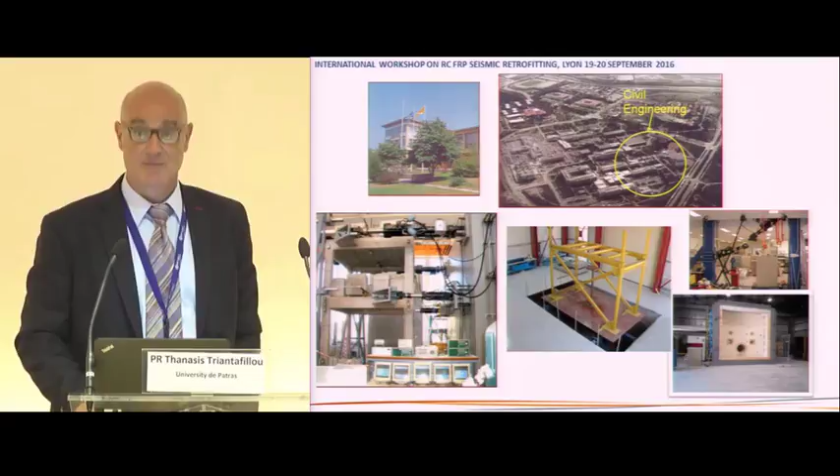Speaking of my university, this is where I come from, Patras, from the Department of Civil Engineering, where we are lucky enough to have very good testing facilities to do nearly full-scale testing, pseudodynamic testing of structures. There's also a relatively small shaking table, the materials lab, and our latest lab is one on fire testing, which we would like to explore as much as possible in the years to come.

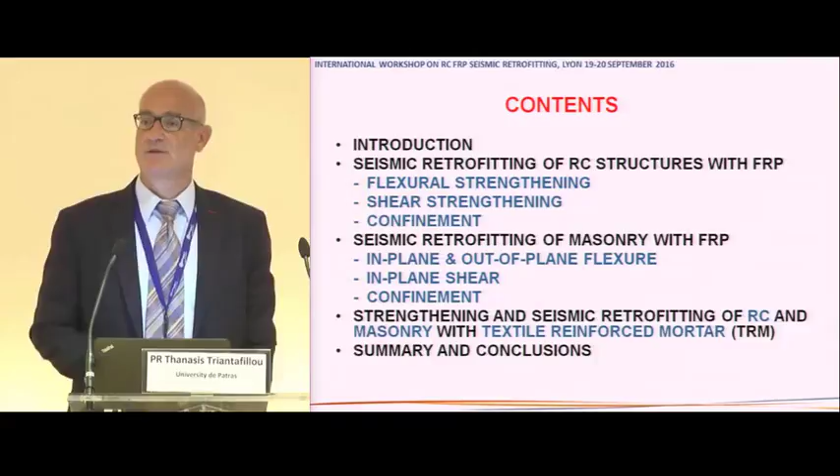These are the contents of my presentation. After a very short introduction, I will talk about the seismic retrofitting of reinforced concrete with FRPs. That will cover flexural, shear, as well as through confinement strengthening. And then I will spend some time to talk about masonry, retrofitted with FRPs, masonry subjected to in-plane or out-of-plane actions. Confinement also will be discussed. And at the end, I will spend some time talking about strengthening and retrofitting with cement-based, with inorganic materials, with fibers or steel or other types of fibers combined with inorganic materials, as was discussed earlier today as well.

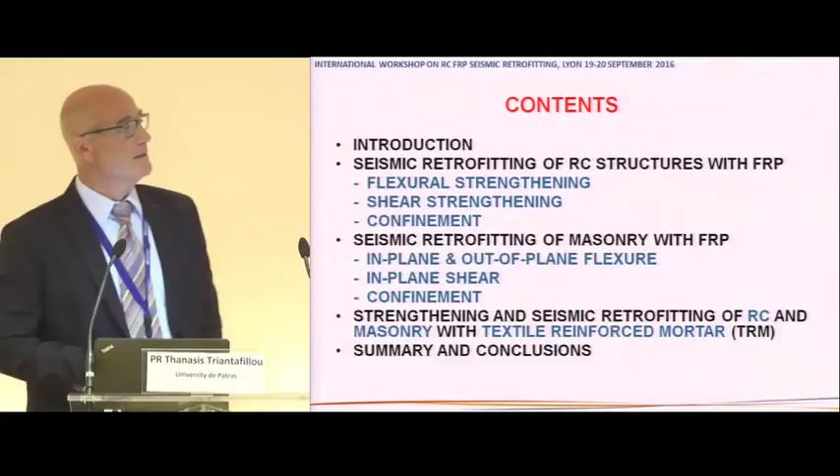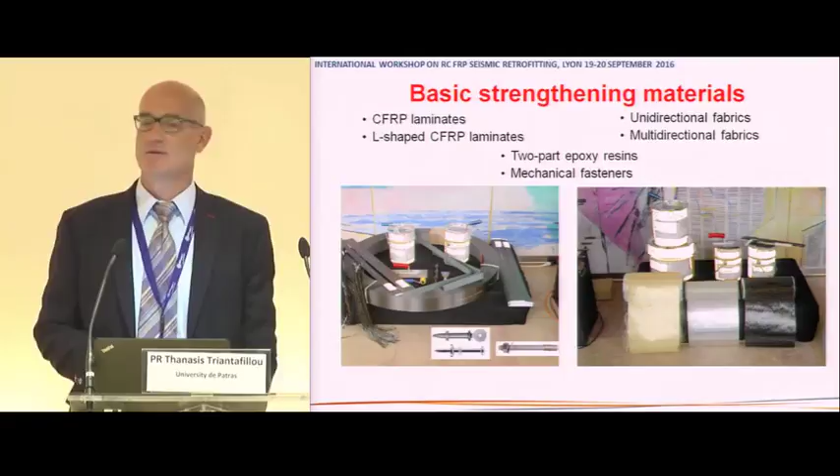I guess everybody knows that FRPs are basically made by combining fibers, carbon, glass, aramid, basalt, with epoxies. They are also available as prefabricated elements. So practically we have two different products. We have flexible fabrics and fibers and relatively stiff products which are epoxy bonded on substrates. This is the material we have to deal with.

If there is one thing that an engineer should know about these materials, it is that fibers behave linear elastic all the way to failure, unlike steel, mild steel. And depending on the type of fiber, we can have an elastic modulus from 70 to 230, even more, even up to 600 gigapascals. And of course, loads are only carried by the fiber. So our material is not isotropic as in the case of steel.

Here I have tried to summarize the advantages and disadvantages of the so-called FRP strengthening technique. Our materials are lightweight. They are resistant to corrosion. They are available in very long lengths. It is easy to apply them without much obstruction of occupancy. They have high tensile strength. It's very important that we do not change the geometry of cross-sections when we use FRPs to do retrofitting. And we do not also modify the stiffness characteristics.

That may be thought of as a disadvantage, as a negative point, as well as a positive one, if the objective of the intervention is to make a structure stiffer. So using FRPs to make structures stiff is not the way to go. That is something that we should remember.

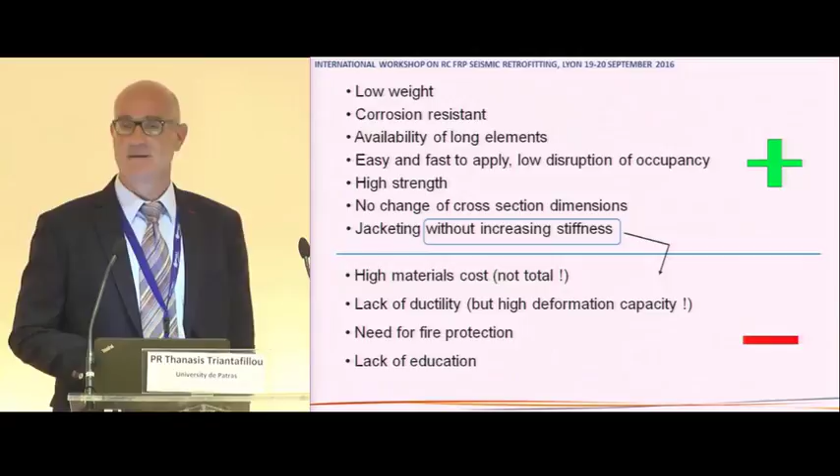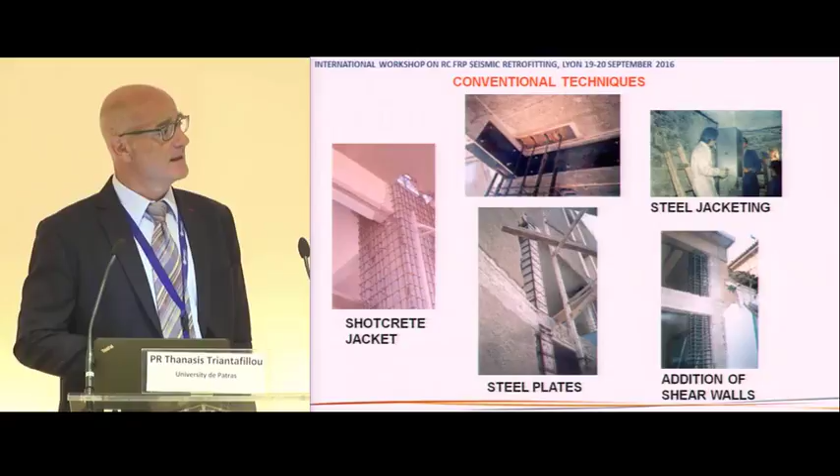Before playing with FRPs, we were used to a number of different techniques, mainly related to the application of steel. To name a few, I will refer to jacketing, to shotcrete, to jacketing by using shotcrete, or to the application of steel plates, steel jacketing, the addition of shear walls, you name it. And then we have the two basic FRP techniques. We do wrapping of structural members with flexible products, or we epoxy bond relatively rigid elements like carbon-based laminates, for example, externally.

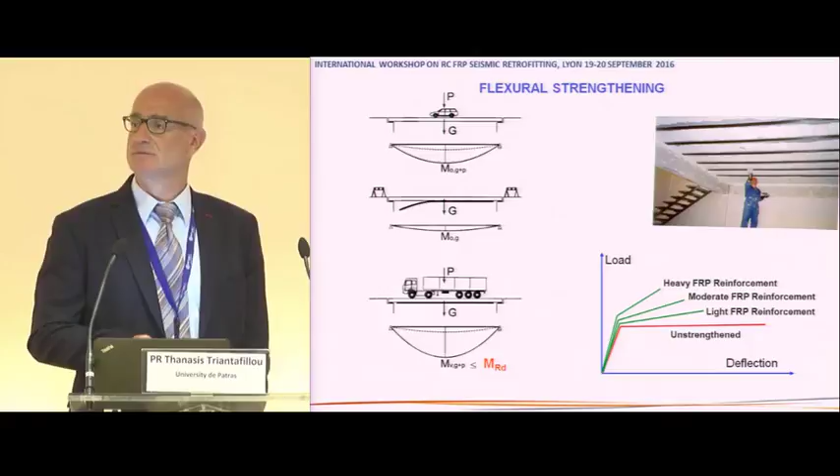The point to remember here is that we don't really change the stiffness. There is a very slight increase in stiffness. Of course, there is a lot of strength gained by the method, but there is also a reduction in ductility. This is not due to the fact that we add FRPs. This is due to the fact that we increase the amount of tension reinforcement. And it has nothing to do with the material itself. And most likely, failure is brittle, is catastrophic due to the sudden debonding of the member, unless we do something to prevent it, unless we use anchorages, for instance.

This is definitely not the way to do flexural strengthening of columns. Although it has been done in many projects, this is not the way to do it. Beams are very easy. Columns are a bit trickier. By adding external reinforcement in columns, top to bottom, we only spend money. We really have to pass the reinforcement through the joints. We have to anchor them through the joints and also do something at the ends to prevent local buckling, etc.

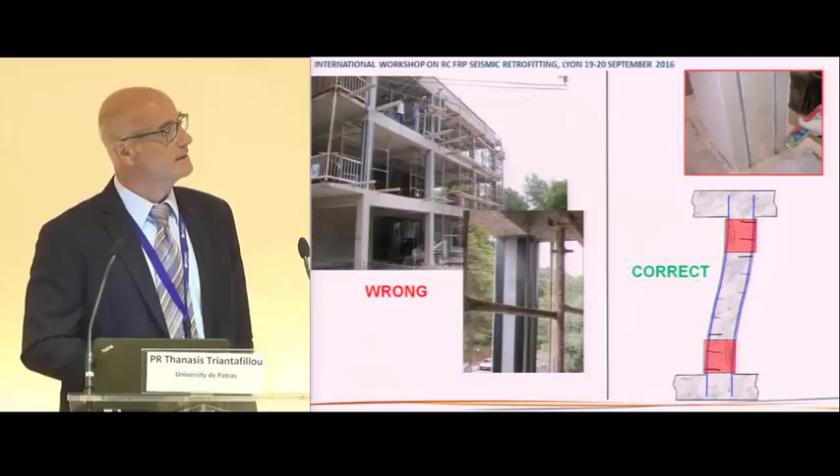So if the objective is to do flexural strengthening of columns, we need to remember that we must extend the material through the joints, slabs, foundations, whatever. Because typically this is where moments are high. There are a number of ways to do it. One is to use near surface mounted reinforcement, that is FRP or even steel rebars placed inside grooves. Or we can use fabrics with the fibers in the longitudinal direction of columns, anchored using spike anchors.

That was discussed by other presenters earlier. Fixed in the foundation blocks, in the slabs, or in the joints. Here, the point to remember is that by applying this method, we only increase the flexural resistance. If we take a look at axial force versus bending moment diagrams, interaction diagrams for these members, there is practically no gain in axial resistance. We only increase the flexural capacity. So the method is beneficial only if the axial load is relatively low, let's say below 0.3, 0.4 of the strength, 30, 40% of the axial capacity.

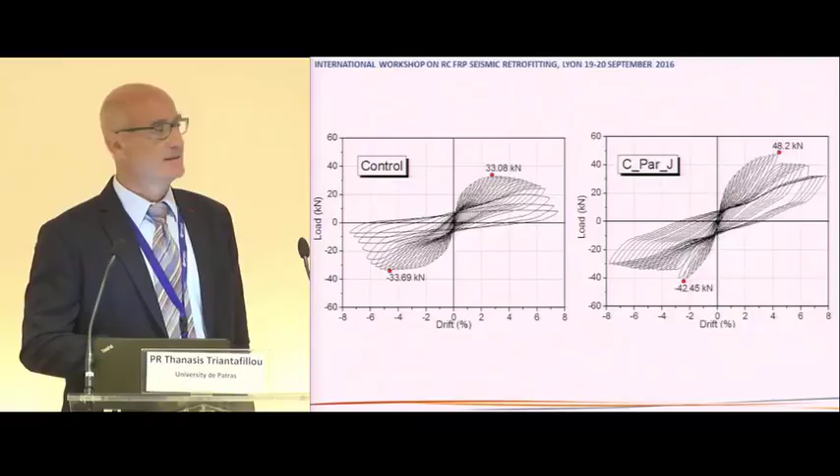And that's a typical comparison of a reinforced concrete column, flexurally strengthened with FRPs. That's a control specimen that is prior to adding the flexural reinforcement, and this is what we get by an identical specimen with this extra externally applied reinforcement. There is an increase in the strength, but practically no increase at all in the stiffness.

When it comes to shear strengthening, the objective of the intervention here is to modify the failure mode from brittle, with very low ductility, to very nice ductile flexural type with stable hysteresis loops. So we practically have to add extra shear resistance to members, and the question is, how do I calculate, how do I design, how do I dimension the externally applied reinforcement to get this extra resistance?

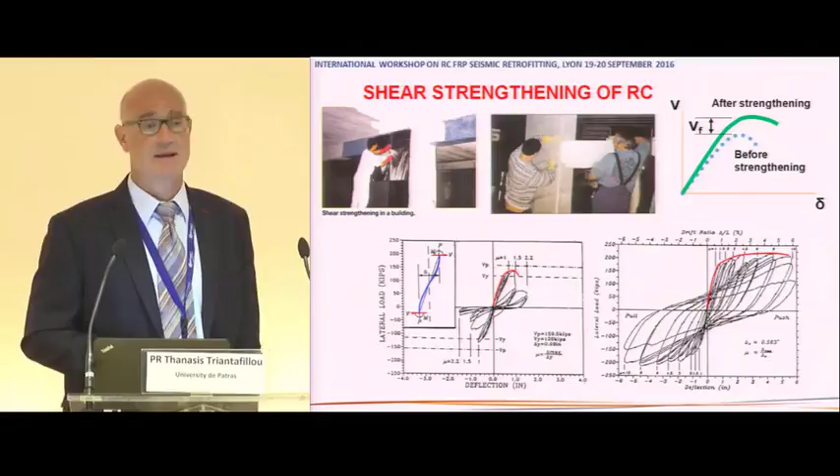The philosophy here is identical to stirrups in reinforced concrete. We have to think of the fibers as an infinite number of stirrups. We have thousands, millions of tiny stirrups applied externally. So they have to be applied in the direction of the principal tensile stresses, basically.

These are typical configurations of FRPs to do shear strengthening. In the case of T-beams, we have many options. Normally we do this one. We use three-sided jacketing with or without anchors. This is a two-sided jacketing, which I would avoid. We have no reason to do that. It's not effective at all. It will debond prematurely. We can simply continue the jacket all around in the web.

Another possibility is to anchor the fibers through the slabs, as was shown also earlier in several presentations. Of course, one expects that this is much more effective than what we have here, because those tension elements, those stirrup type elements are fully anchored. They form a loop, so they carry stresses, and most likely the failure mechanism here will be tensile fracture of the fibers as opposed to debonding, which might be the case if we have open jackets.

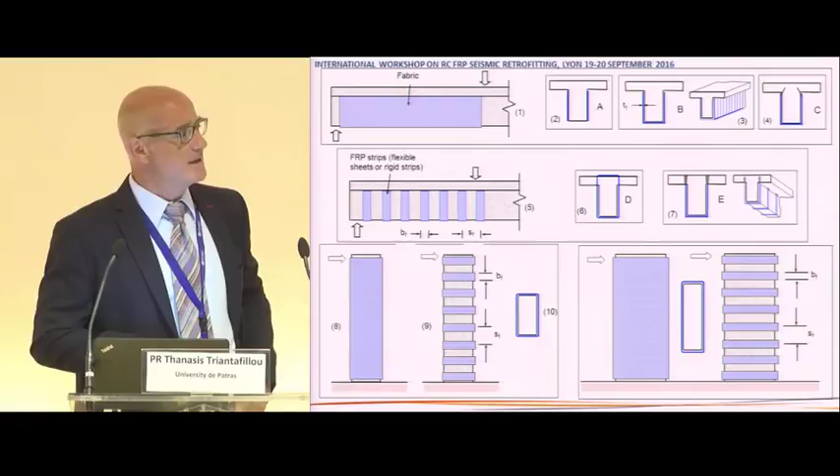When it comes to columns, our life is of course much easier. Typically it is quite easy. We have access around columns. Even if we don't, all we have to do is to remove some of the parts of the infill walls adjacent to the columns to get access. So normally, making those closed jackets in the case of columns is easy.

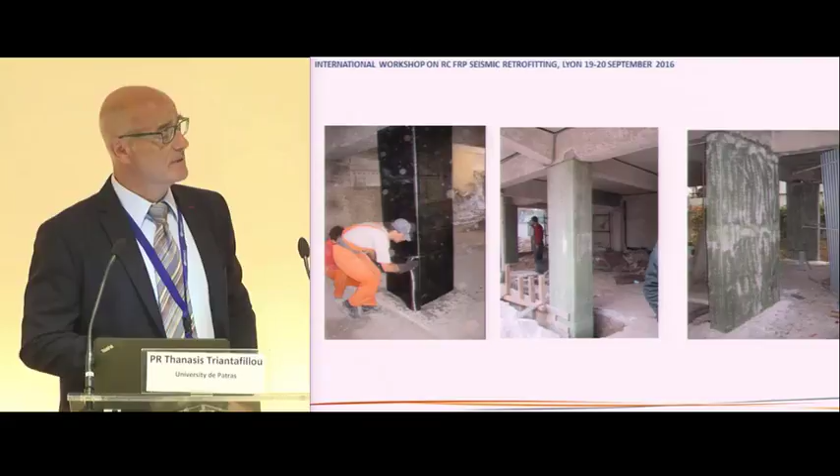A few photos to illustrate the concept. You see wrapping of columns to increase the shear capacity with carbon or with glass fibers. Wrapping of members supporting large structures for shear strengthening, as well as for confinement, which I will discuss a bit later. We can do many very good jobs. You see stirrup type elements, straight fibers, or wrapping of columns to increase the shear resistance.

We can also do a lousy job if we do the application the way you see here. It is not a good solution to try to apply the reinforcement, to follow the profile of the cross-section, unless we do something about the anchorage that will debond prematurely and will not really add any capacity to the member.

When it comes to calculations, to the dimensioning of shear strengthening, we have one unknown, that is how much extra capacity, how much additional shear strength I need to add to my structural member. It's right here. This is the total capacity, and all we have to do is relate the contribution of the FRP to the shear capacity of the structural member to the properties of the jacket.

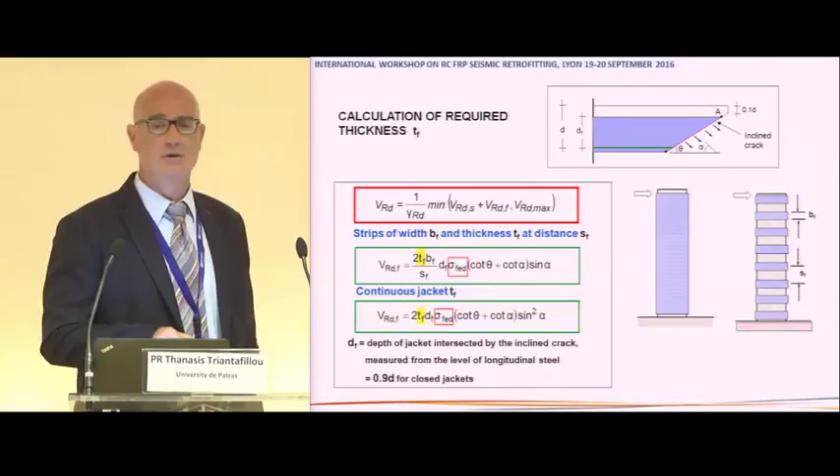One possibility is to use formulas, equations which are identical to what we have for the case of steel stirrups, internal stirrups, the only difference being that we don't have a yield stress for our strengthening element. We have an effective stress, the stress in the FRP at failure of the jacket, which depends very much on the failure mode. It depends on whether the fibers will rupture or will debond, and that is something we have to take into account.

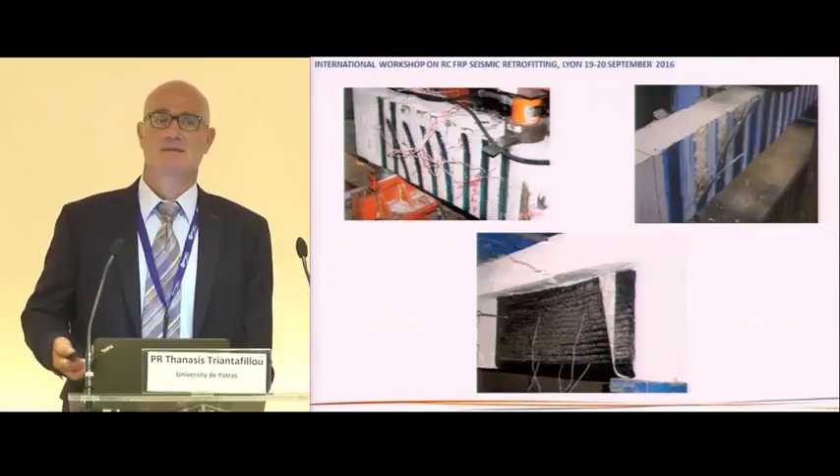Speaking about debonding, you see what I mean here. This is an open jacket. These are strips applied to do shear strengthening. The fibers are not continuous, so most likely what we expect is this type of debonding in the free part, which is also shown here. So the fibers are not utilized to their full capacity, and that is something to be taken into account in design.

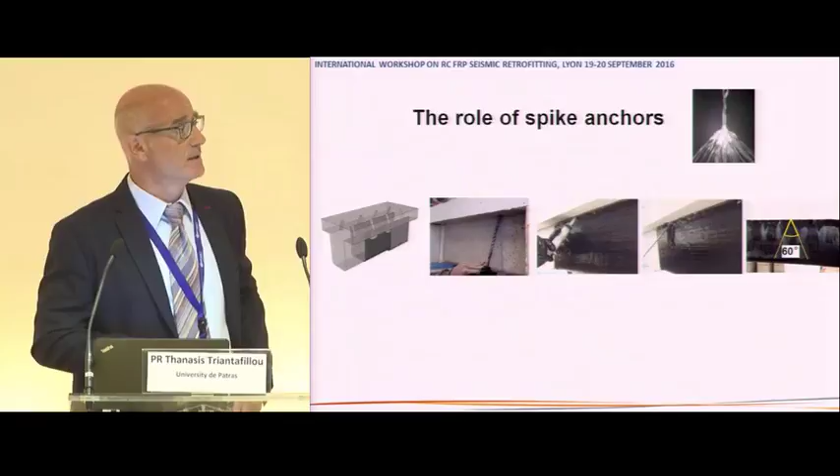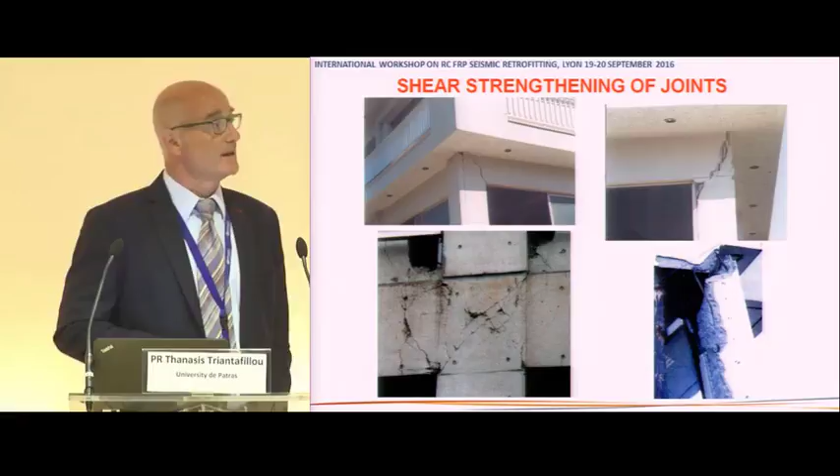Shear strengthening of joints, that was very nicely covered by Maurizio this morning. That's a very tricky area. We typically get shear failures in joints due to the lack of continuous stirrup type reinforcement in those elements. One way of shear strengthening the joints is through the application of FRPs. Ideally, we should place the fibers in two directions, both horizontally as well as vertically. If we choose one of the two methods, the horizontal configuration is preferable, but ideally we should do both.

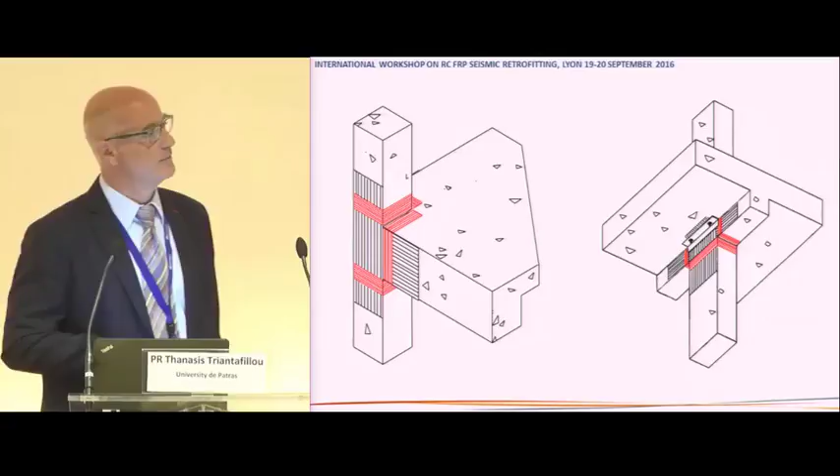A few applications on shear strengthening of joints. So you see the fabrics applied horizontally in this case.

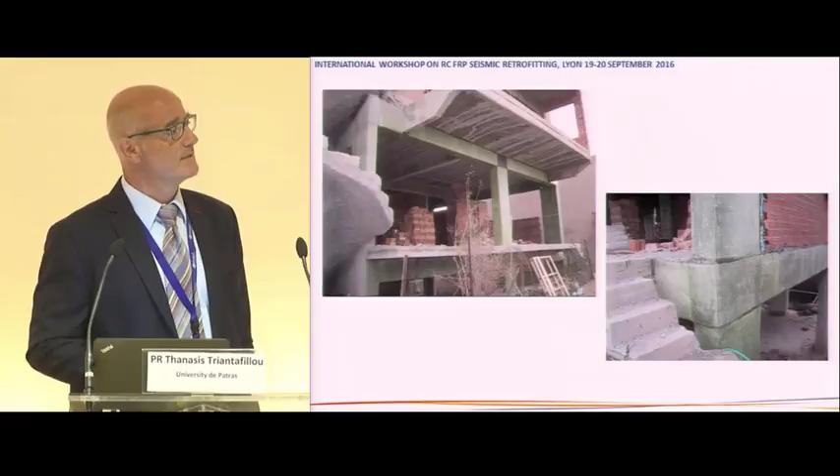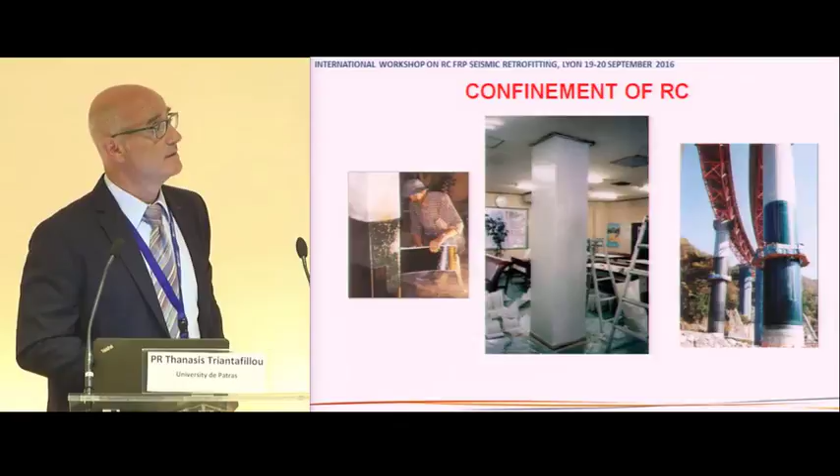Time to say a few things about confinement, which is probably the most important application of FRPs in seismic retrofitting. We do confinement for many reasons. They were discussed by Maurizio. I have tried to summarize them here as well. If we do full wrapping of columns, we normally do this to increase the axial capacity of members. But if our interest is increasing the deformation capacity, we only need to do local jacketing, only at the ends of members to confine those areas.

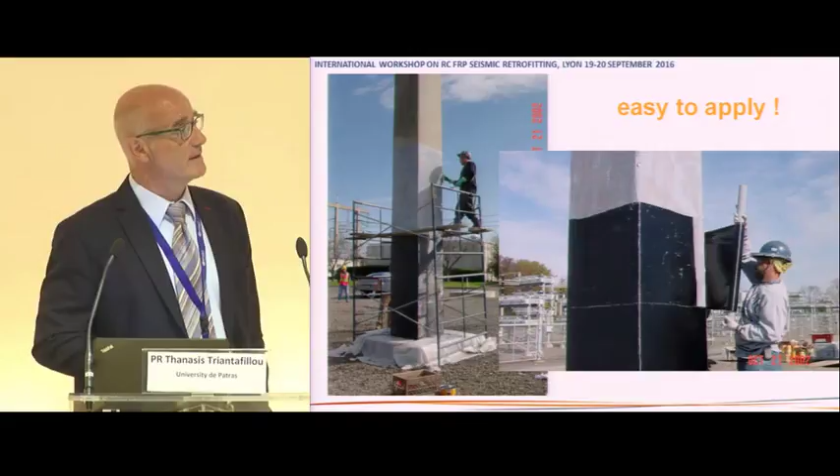We do this local jacketing also to prevent failures at lap splices and also to delay or even eliminate local buckling of the longitudinal reinforcement if our stirrups are at a relatively large spacing. So those are the basic reasons why confinement is done by FRPs. And why FRPs as confining elements? They are very easy to apply. This is the proof, that's a huge column and everything is done by a single person.

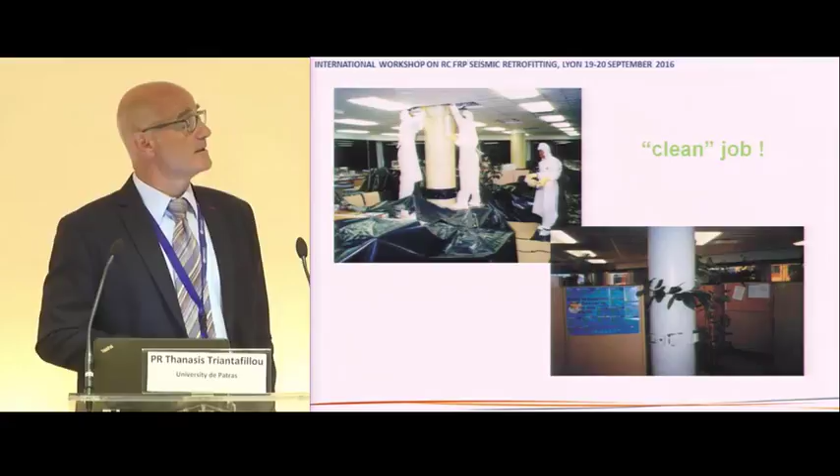It's a relatively clean job. We don't really disturb the occupants in buildings. And here are some photos of the application. Full wrapping with glass fibers in small dimension columns to increase the axial capacity.

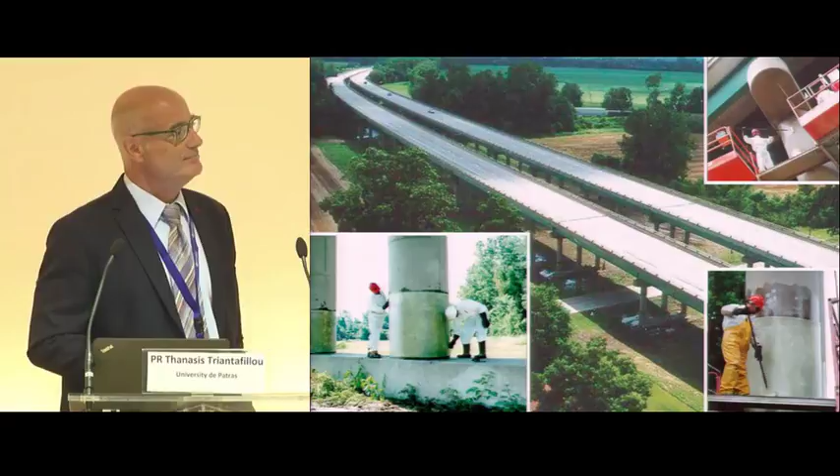This is an interesting project from the UK. This is confinement of columns with aramid, which is also resistant to impact. You know, those columns are sometimes hit by drunk drivers in the UK. Hopefully we don't have some of them here. So aramid was selected as a solution here to also be impact resistant. That's one of the very first applications of FRPs in the early 90s, in the United States, involving local wrapping of large diameter circular columns to enhance ductility.

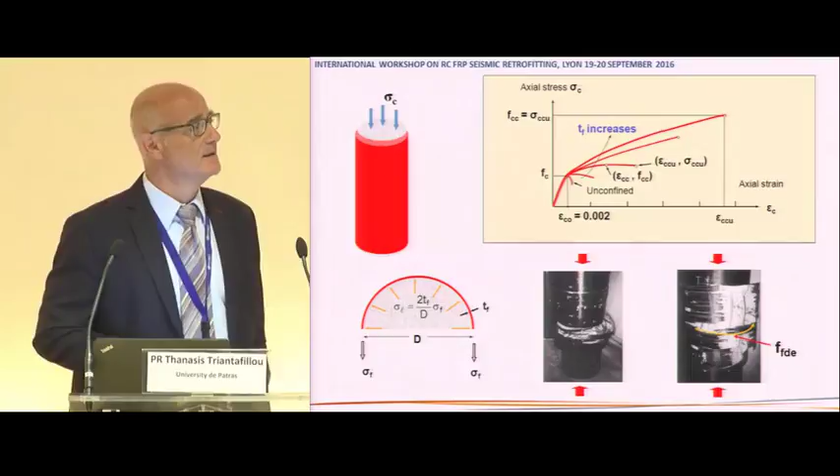There's of course no time to talk about modeling and all the details of the design calculations, but I will only say that what we need is a simple confinement model. That is, we need to somehow relate the increase in the strength of concrete or the increase in the deformation capacity of concrete to the properties of the jacket. And clearly, the thicker the jacket, the higher the number of layers in the jacket, the higher the strength and the higher the deformation capacity. If we have such a model, then we use it in our design formulas to do the dimensioning.

If you look in the literature, you will literally find hundreds of these types of confinement models relating the strength or the deformation, the ultimate strain of confined concrete, to the confining stress. This sigma, whatever, LUD is the design value of the ultimate confining stress exerted by the jacket in the concrete. And that confining stress can be related to the properties of the jacket and to the geometry of the cross-section. It depends on the dimensions of the cross-section, on the rounding at the corners, etc. So that's the whole idea. If I want to calculate how many layers I should use, I need to have one of those confinement models and plug in all my parameters.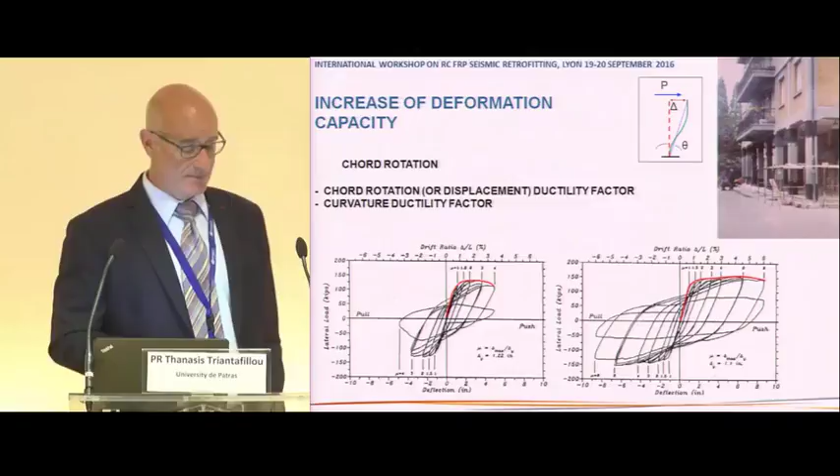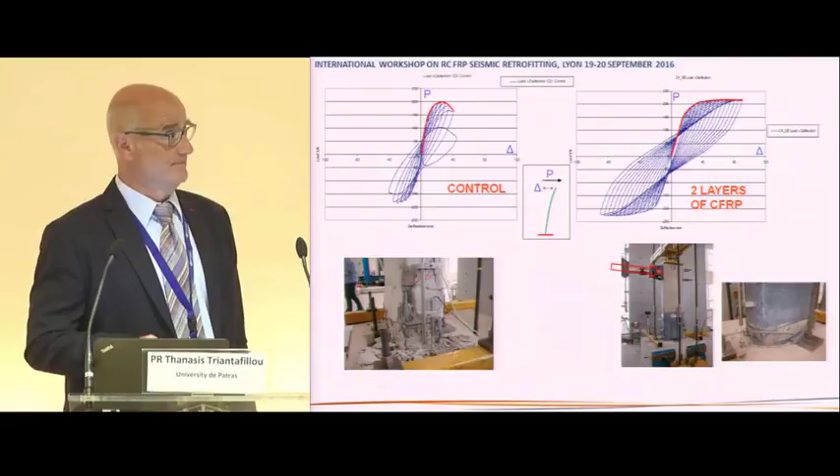And here is an example of how that increases easily by applying, for example, a couple of layers of CFRP, even in columns with rectangular cross-sections in the order of 25 to 50 centimeters, as is the case in this photo. This is the response, the force versus the lateral displacement of typical columns. It is really important to emphasize that there is practically no increase in the strength. So we don't do this jacketing, this local confinement, to increase the strength of columns. We only do that to increase the ductility, to have a number of stable hysteresis loops and get a lot of deformation capacity. So strengthening is not the case.

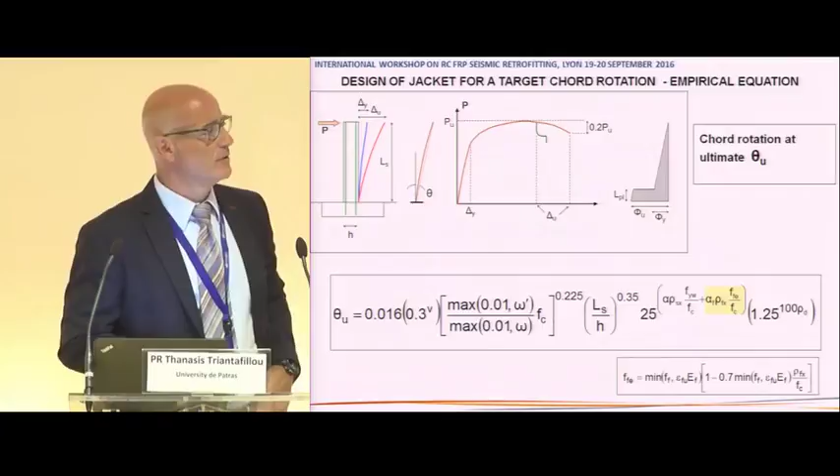Again, calculations are relatively straightforward. We won't discuss the details. We have to relate the ultimate value of this chord rotation to some properties of the jacket. There are some analytical formulas. For example, if you go by basic principles, you can relate this ultimate chord rotation to the ultimate curvature of cross-sections. This ultimate curvature depends on the ultimate strain in the concrete, which depends very much on the level of confinement. And by doing that, we can do the design. Alternatively, we can use empirical formulas, simplified and highly empirical, relating the geometry of the cross-section, the amount of internal reinforcement, strength of concrete, the shear span, etc., as well as the properties of the jacket, to the ultimate chord rotation. This is a copy of the formula from Annex A of Eurocode 8.

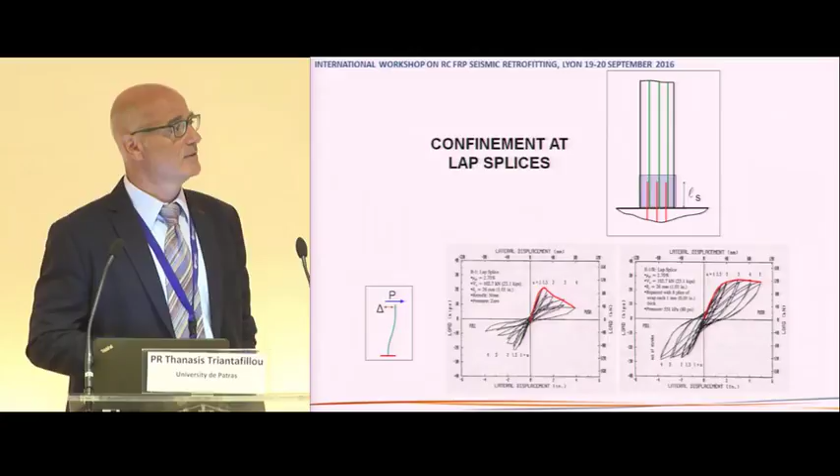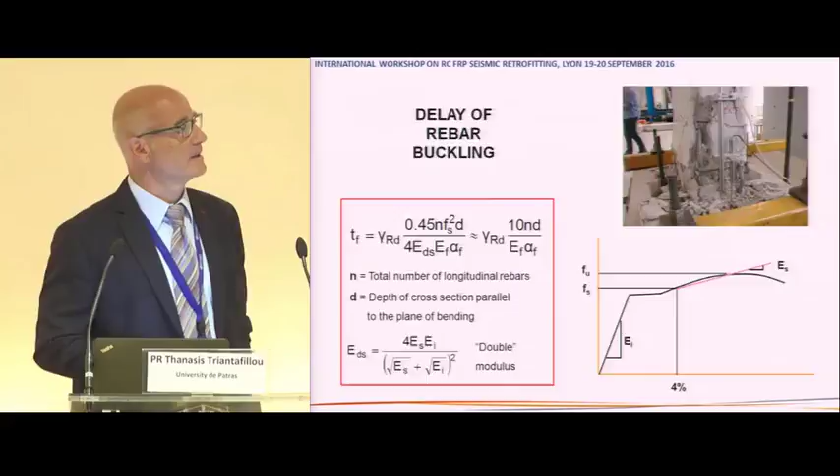The third reason for confining columns is to prevent failures at lap splices. Again, jacketing here is local and it transforms brittle, catastrophic failures without ductility into very nice ductile ones by preventing slippage of rebars in splice areas. The mechanism is very simple. By confining those areas down here, we mainly increase the friction. We can think of a friction model, so we increase the friction here, hence we increase the shear strength of the concrete. Hence we prevent this slippage. And the delay or the prevention of buckling of the rebars is the last application related to confinement in reinforced concrete. To make a long story short, I will try to summarize this design procedure for columns.

First of all, we have to make sure that the objective of our intervention, of our retrofitting, is not stiffening. We cannot make columns stiffer by using composites. So if that is not the case, then we have to design the jacket for the target value of the shear resistance. So we do the shear strengthening first, so that we satisfy the capacity design requirements. So that is, flexural failure comes first. And then we design for the target deformation capacity, for example, the chord rotation or the chord rotation ductility factor.

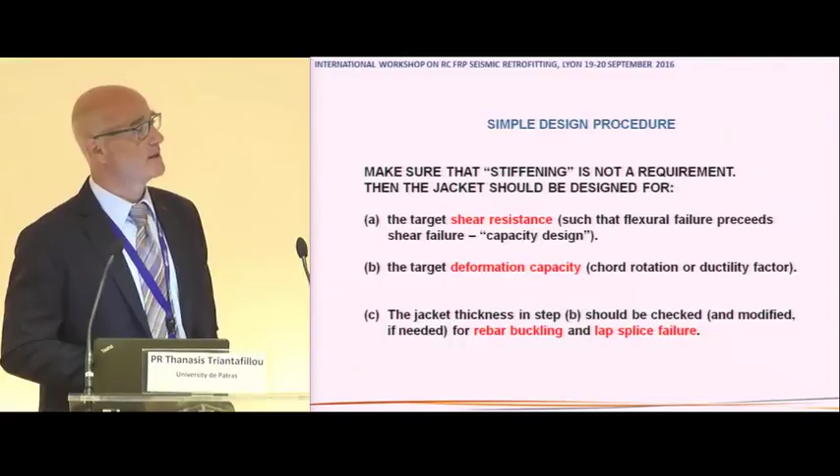And then we check the thickness of the jacket in this step for the case of rebar buckling or for the case of lap splice failures. I think I have, yeah, here is an example of this approach.

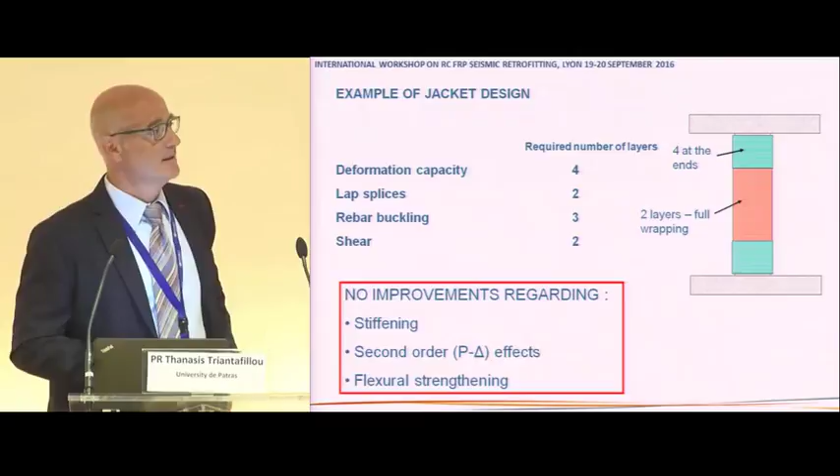Let's say, for instance, that our calculations result in 4 layers for the deformation capacity. If I need to reach a certain level of the deformation capacity, I need 4 layers. I need 2 layers to prevent lap splice failures, 3 to prevent buckling of the rebars, and 2 to eliminate shear. Then I wrap the column from top to bottom with 2 layers, and then I add another 2 at the end, so that I have 4, and that will cover all the cases. Again, I don't provide flexural strengthening. I don't solve any problems related to P delta effects, to stiffening, etc.

Okay, maybe quickly we can take a look at a case study. That's a building that was retrofitted about 10 years ago in Crete. That's a beautiful island in Greece. If you have not been there, you should go. In the south part, I'm sure you know it. The objective of the intervention there was to complete the job in about a month. That was a private hospital in the city of Chania in Crete, which was retrofitted with about 800 square meters of carbon fibers.

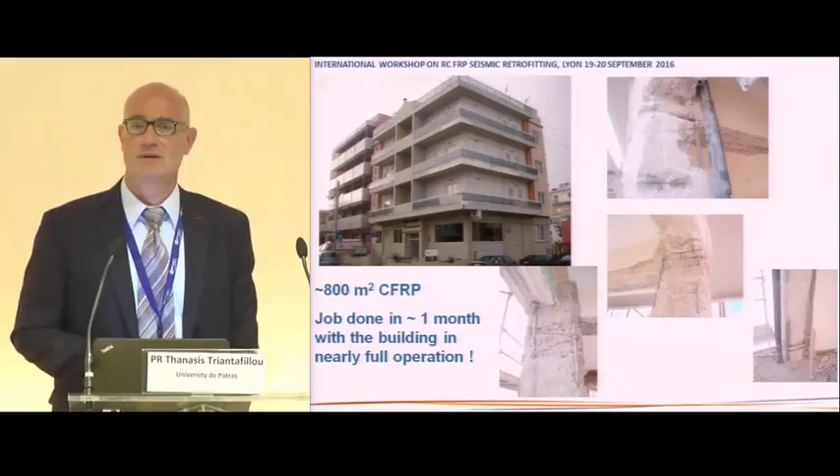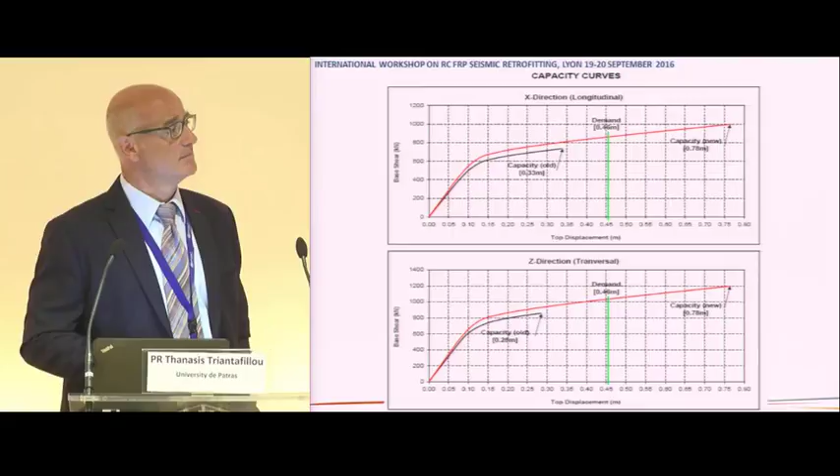Of course, an analysis of the structure has to be done first, a nonlinear analysis to get the response prior to retrofitting. These are capacity curves, base shear versus top story displacement. Capacity curves prior to retrofitting, shown by black, and after retrofitting, shown by red. Again, there is no stiffening in the building. The only result of this intervention is that the ductility, the deformation capacity, increases considerably, extending well beyond the target that is shown by the green line.

This was done by wrapping columns, by shear strengthening in the columns, by shear strengthening in the beams, shear strengthening in the joints, and of course by increasing the ductility in columns through local jacketing. Some of the cantilevers had to be strengthened in flexure as well.

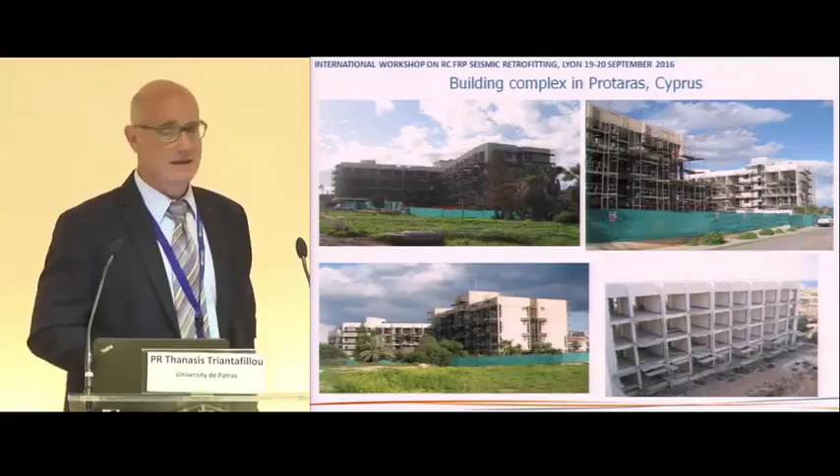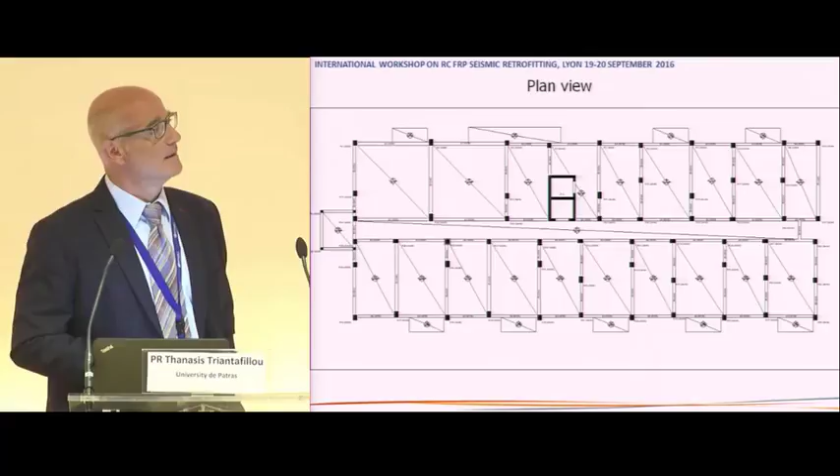Well, I'll skip all the drawings and only say a few words about another interesting application in Cyprus. The idea here was to strengthen, as well as to increase the ductility and the stiffness, in a relatively flexible building with the plan view that you see in this slide. There was heavy local damage in various structural members in this structure. The retrofitting scheme was a mixed one.

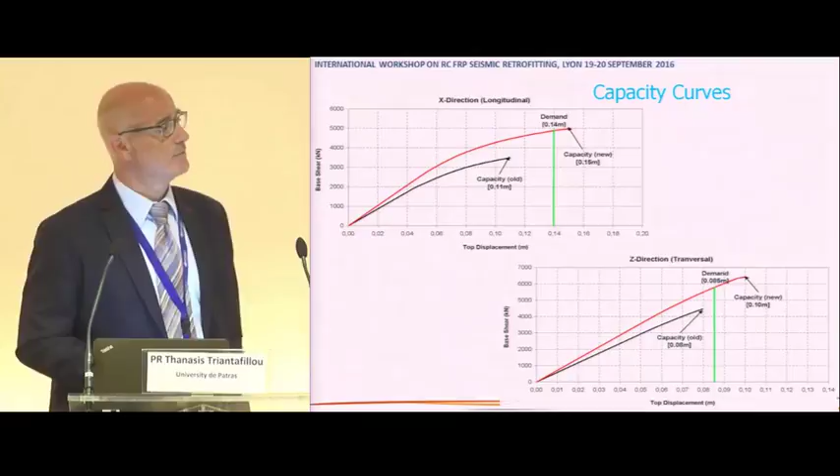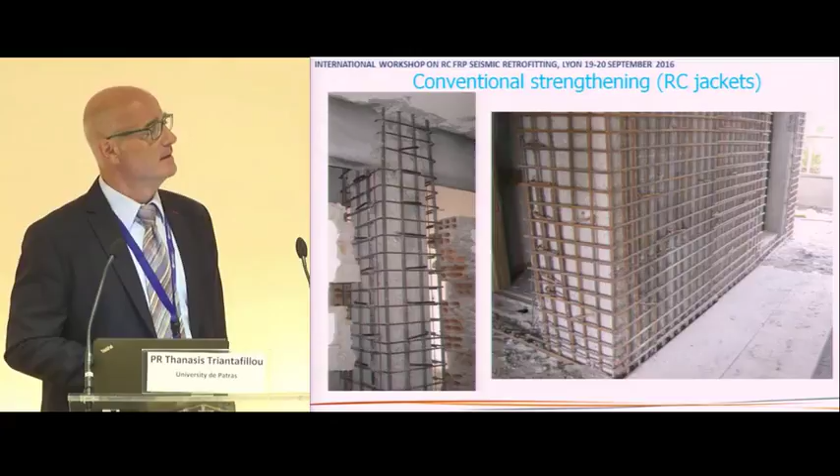It involved repair of the local damage, reinforced concrete jacketing, shotcreting in selected columns and shear walls, as well as the application of CFRP or GFRP to increase the shear capacity of certain columns. As opposed to the capacity curve that we saw in the previous case study, here we have a non-negligible increase in the stiffness of the structure through this mixed strengthening scheme. There is an increase in the strength as well as extra ductility, extra deformation capacity. A few photos. This is the traditional method of shotcreting and reinforced concrete jacketing combined with FRPs used to do shear strengthening of beams or columns.

Well, let's talk a little bit about masonry. It all started with concrete, something like 30 years ago, maybe more. And then people thought that FRPs would be a good possibility for unreinforced masonry structures, subjected mainly to seismic loading. Why? Because those structures are made of structural members which have a behavior very similar to the behavior of plain concrete.

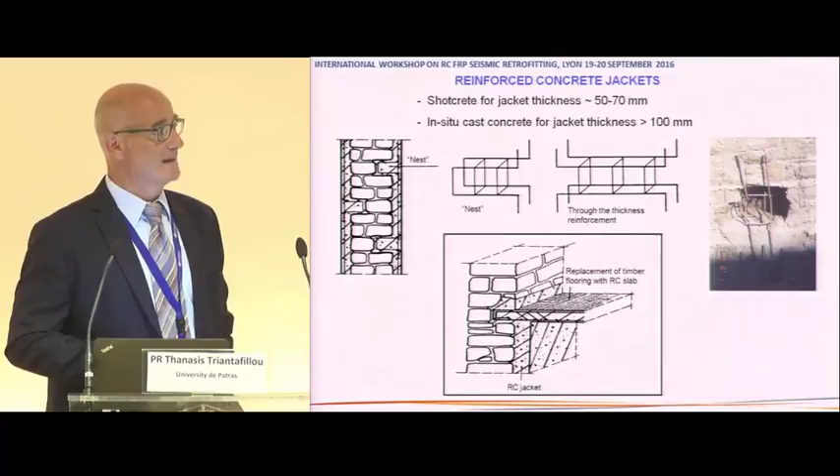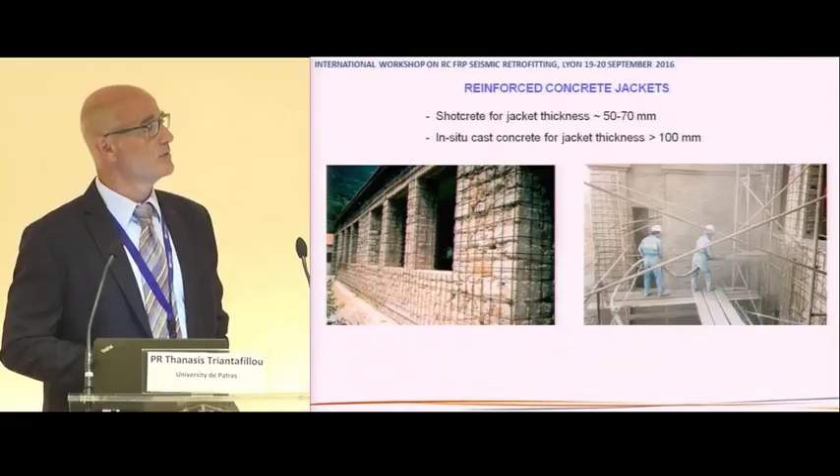which means that we can forget about those classical, those standard techniques for masonry, one of them being the shotcreting, the jacketing, which involves adding thickness and weight, which is not necessarily good. You see some photos of jacketing with shotcrete in masonry. There are many problems associated with that technique. The weight increases, the buildings become stiffer, the dimensions get higher, the method is labor intensive, etc. And most importantly, it is not always applicable. Due to aesthetics, because the architect will not let us do it, we cannot apply the method in many structures.

And that's how it started. People thought that FRPs would be a good possibility. For example, if we have out-of-plane bending of masonry walls, we could add the fibers in a way so that they would act as tension elements.

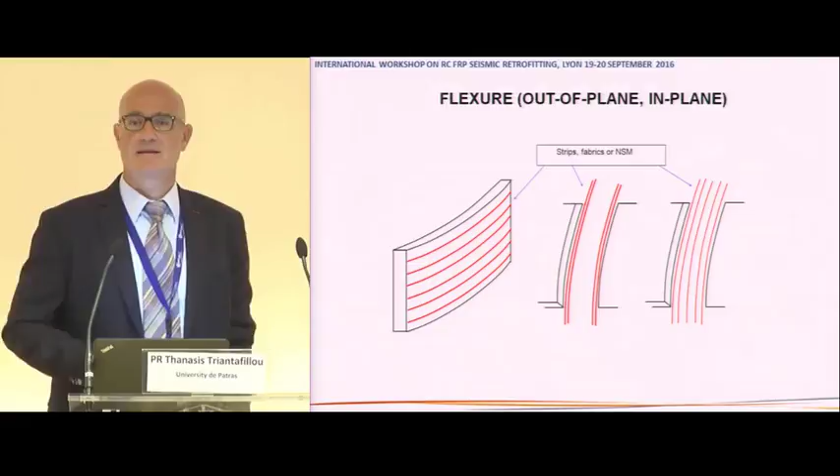If we're talking about in-plane bending, then the fibers should be placed as far as possible from the neutral axis to carry tension stresses, etc. One simply has to follow principles of reinforced concrete here, except for the fact that our reinforcement is not yielding, it's not a ductile element, it's not steel, but a linear elastic element all the way to failure.

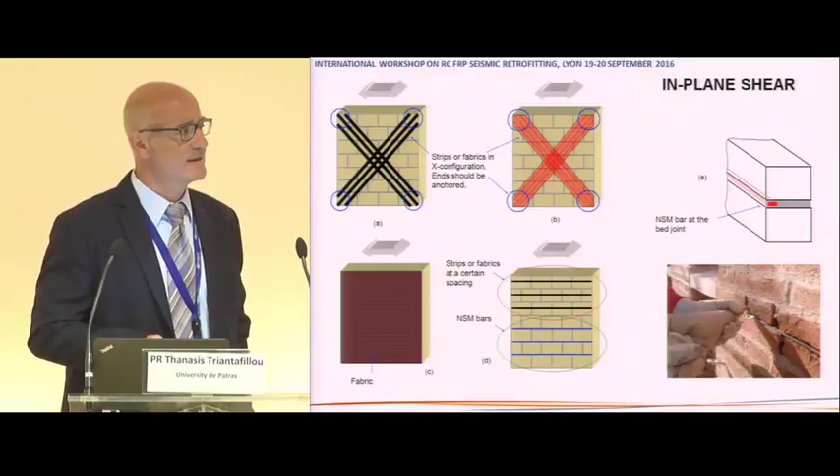When it comes to shear strengthening, in-plane shear, possibilities are diagonally placed strips or fabrics, near surface mounted, that is hidden in the bed joints, FRP rebars, surface reinforcement, fabrics covering the whole surface, etc. Well, that's not a very nice idea, but people have done it anyways. Confinement is also a possibility in masonry, confinement of domes or rectangular in-plan structures, even of masonry columns. And I think I have a number of photographs illustrating some of those applications.

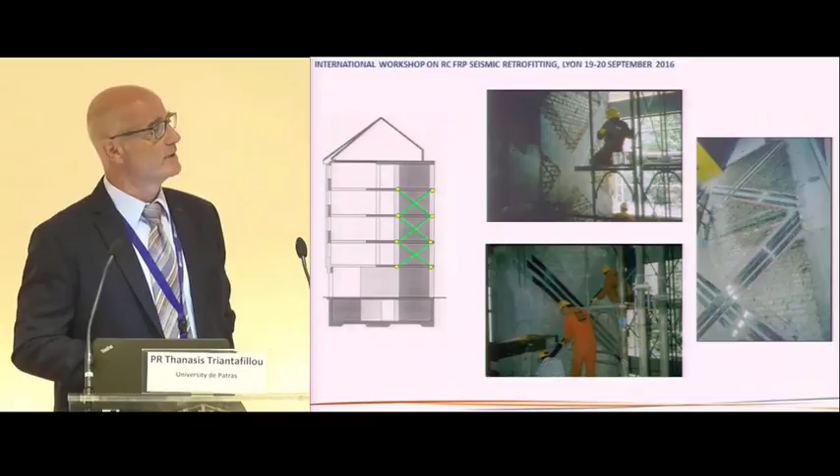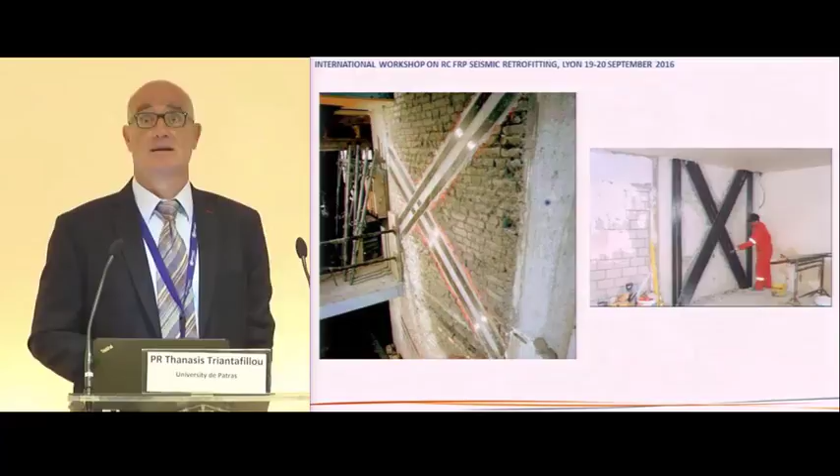Here we have in-plane shear strengthening of masonry walls. That's probably one of the very first applications in this. That was done in Switzerland in 1993, 94, if I remember correctly. So you see application of CFRP strips to increase the in-plane shear capacity of masonry walls. A photo from Greece. Shear as well as flexural strengthening of a school building. Thanks to Fyfe for the photo.

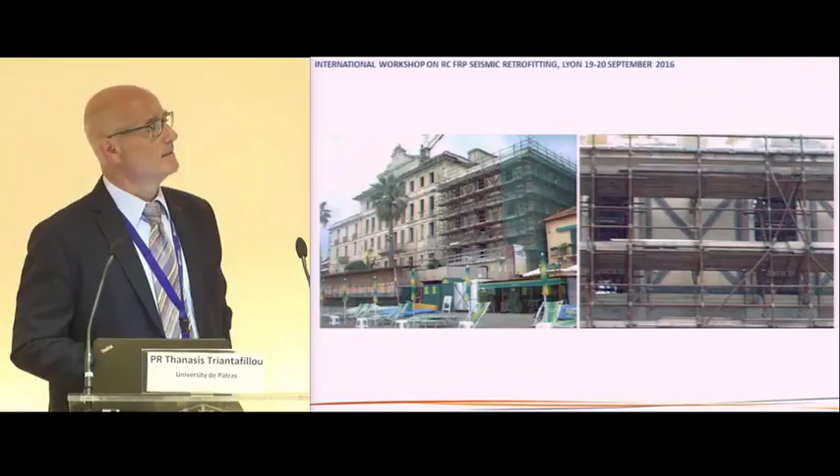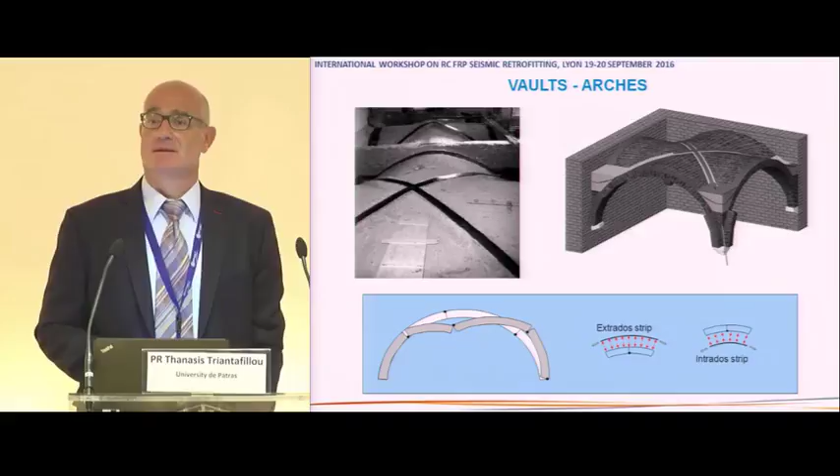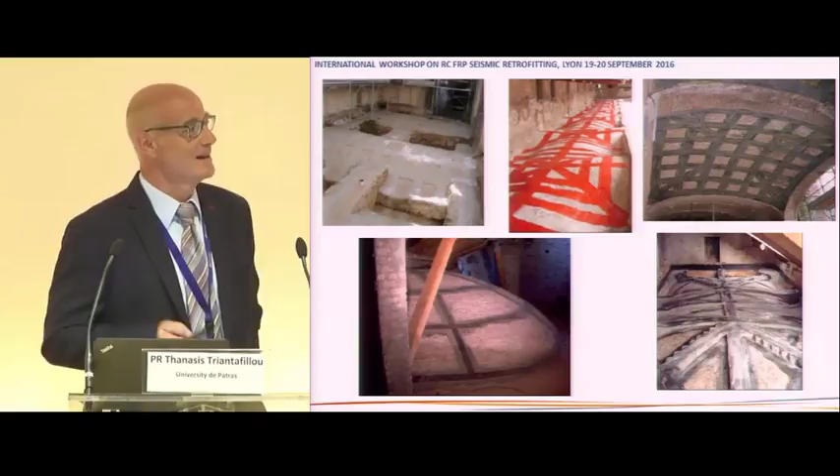Out of plane strengthening of masonry vaults to make them stable. My colleague Paolo has some very good pictures of this type of applications. Not very nice ones. Some of them are really ugly and not that effective. But anyhow, FRPs have been applied heavily in this area. That's an interesting possibility. Again, that's one of the very early applications of FRPs. One can use transparent fabrics so that the material is not visible by naked eye. And that's also an interesting application.

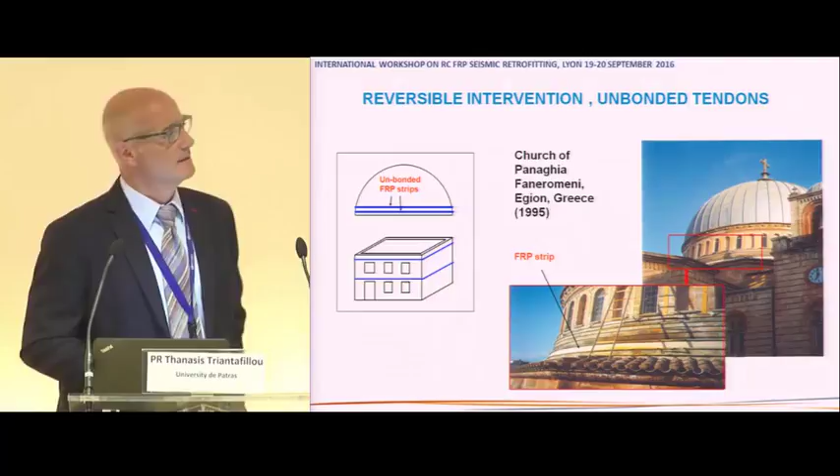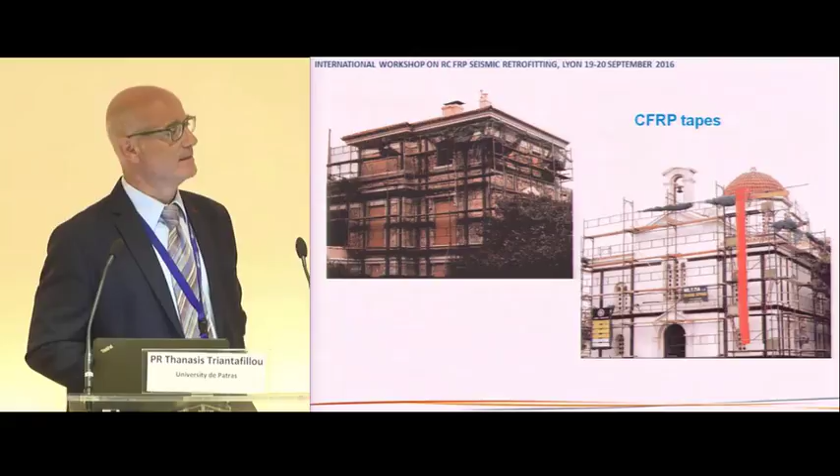One can use unbonded strips or tapes as a replacement of traditional steel tendons. The advantage of this application being that the technique is reversible. The materials can be removed. Confinement using white tapes can be done to stabilize buildings to prevent out of plane bending and cracking at the intersections of walls. Confinement of columns with glass fibers is a possibility. Wrapping using strips in the form of a spiral. That's also one of the very first applications in masonry, etc., etc.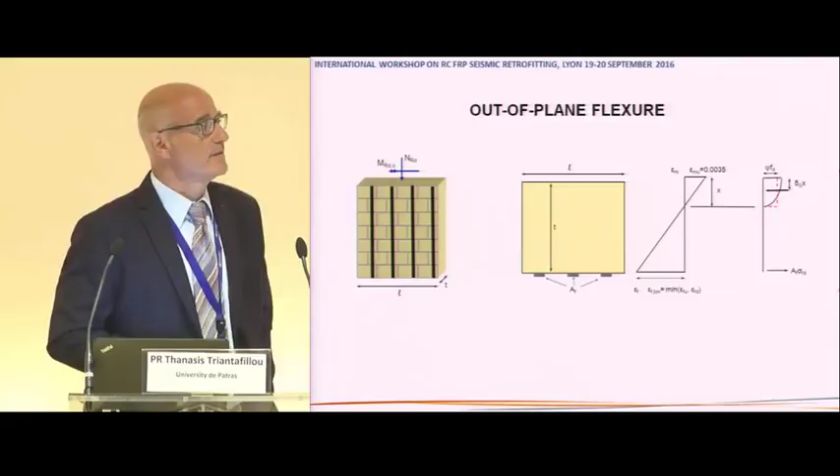I would like to skip all those very nice photos to say only a couple of words about calculations. We need to think of masonry retrofitted with FRPs as plain concrete reinforced, I said that before, with a non-yielding material, with a reinforcing system that does not yield. So when it comes to cross-section analysis, we can adopt models that we use for reinforced concrete. We can take a look at the distribution of strains. We have the corresponding stress profiles, and then stresses or forces carried by the fibers, by the FRPs, until something in the cross-section fails. And that is either the FRP in tension or due to debonding or the masonry in the compression zone. So this is really reinforced concrete theory applied to a non-yielding reinforcing material. Likewise for in-plane flexure.

That's the last part of my presentation and probably the most interesting one, I don't know. Paolo summarized very nicely some of the problems associated with epoxies used in FRP systems. Those materials are becoming expensive. Epoxy resins are not cheap materials. They have problems with high temperatures. The interventions with them are not always compatible, especially when it comes to historic buildings, old masonry buildings.

So for a number of reasons, we thought of replacing epoxies with more user-friendly mortars, green or non-green mortars, cement-based or maybe hydraulic lime-based materials combined with fibers, including steel cords, fibers in at least a couple of different directions, that is combined with a textile type of structure. Those materials can create a composite system that does not suffer from all the disadvantages associated with epoxy resins. That's what we call a textile-reinforced mortar, as opposed to FRP, TRM. There are many names in the international literature. TRC in Germany, textile-reinforced concrete. FRCM in the States, etc., etc.

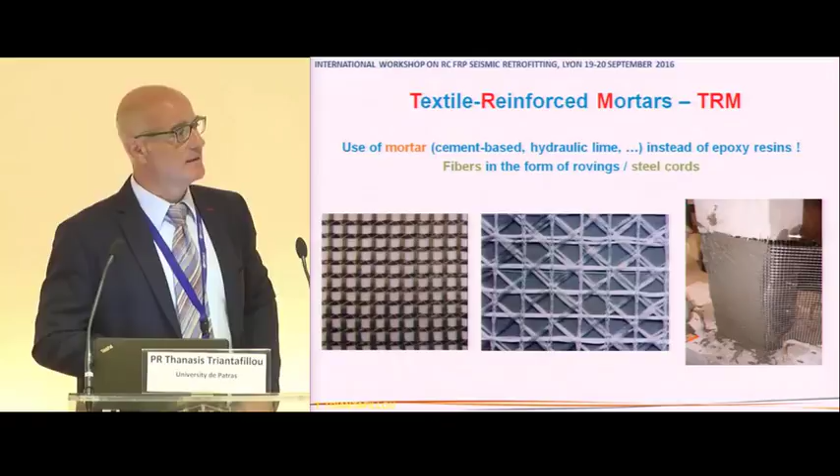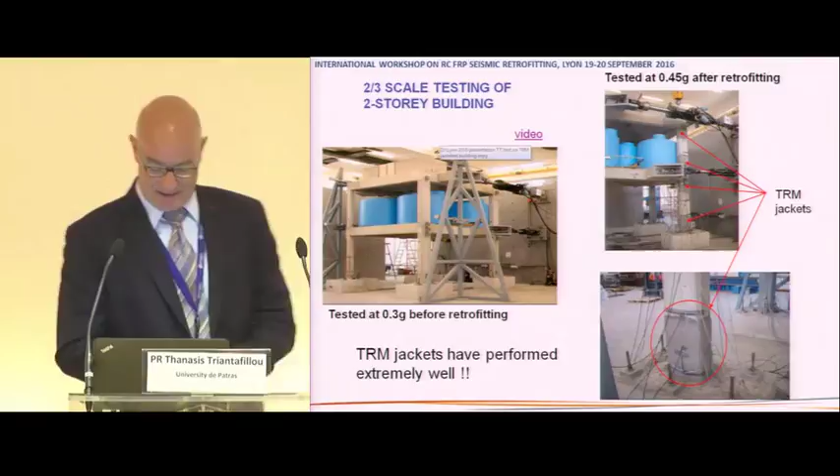And that was also tested in a, that's a touch screen. Yeah. No, sorry. I'll try to do it. That system was also tested in a nearly full-scale building in our lab, where columns were locally jacketed with TRM.

With full success, no failure was observed. The building was tested up to 0.45 G after retrofitting without any failure of the jackets.

The system can also be used to do shear strengthening of beams, for example. The effectiveness here is not as high as in the case of FRPs due to slippage of the fibers, if we're talking about glass or carbon rovings. It is also effective when it comes to shear strengthening of T-beams, not only rectangular cross-sections, but also T-beams.

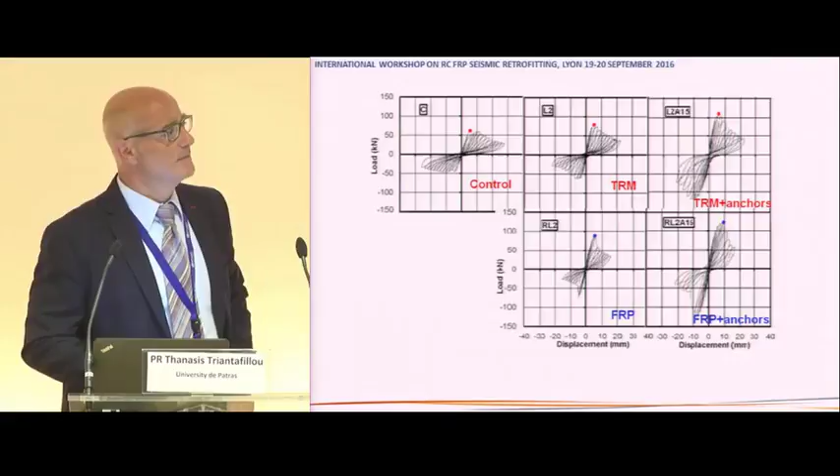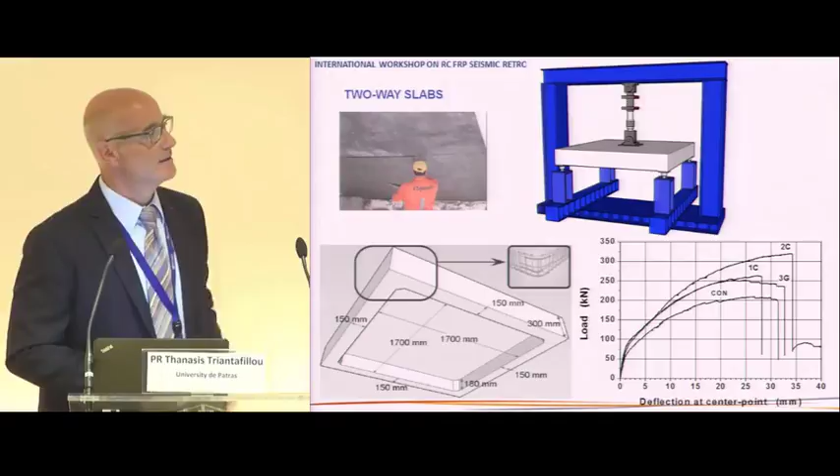It has been used to do flexural strengthening of two-way slabs, slabs in two directions. It's an ideal system for this case because you have fibers, you have the rovings in two directions, so you can use them in both directions.

But it's, according to my view, probably the most promising solution when it comes to masonry, because the mortar, the matrix, is more compatible with the substrate. The method is more reversible in comparison to FRPs. There is no epoxy, there are no organic polymers involved, and it is cheaper. It is also quite friendly to the applicators, to the labor, to people using it.

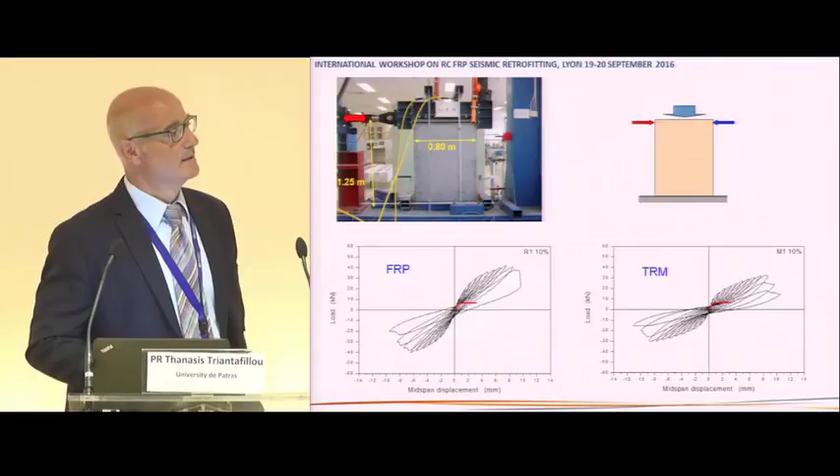If you do strengthening with FRP, let's say with a layer of a textile bonded using an epoxy resin, that's what you would get. If you use the TRM system, that is the same textile bonded with a cement-based mortar, you get a response that is very, very similar. And sometimes the ductility is even higher, as you see here.

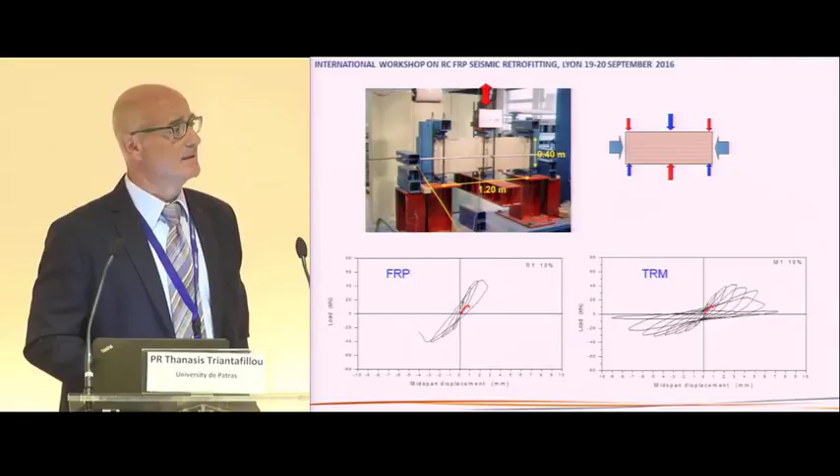This is an in-plane flexure of a typical masonry wall-type element, without any axial load. Again, red is what corresponds to the non-retrofitted wall. That's what we get if we use FRP, and that's what we get if we use the TRM. So the effectiveness of the two systems is very similar, and the ductility in general of the TRM system is even higher.

The last application of those textile-based materials was in the field of infills. We think that infills can be retrofitted by TRMs so that they would work together with surrounding reinforced concrete frames, to make reinforced concrete structures not only more ductile but also stronger and stiffer.

The concept is illustrated here. The TRM is applied on the surface, one or both sides of the walls, and then, if needed, it is anchored through the thickness of the reinforced concrete elements. That was tested in the lab in nearly a 2/3 scale, I would say, 3-story frame.

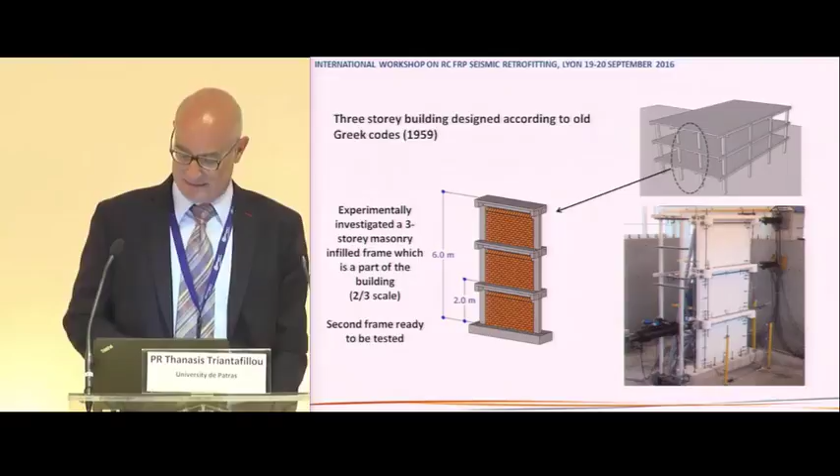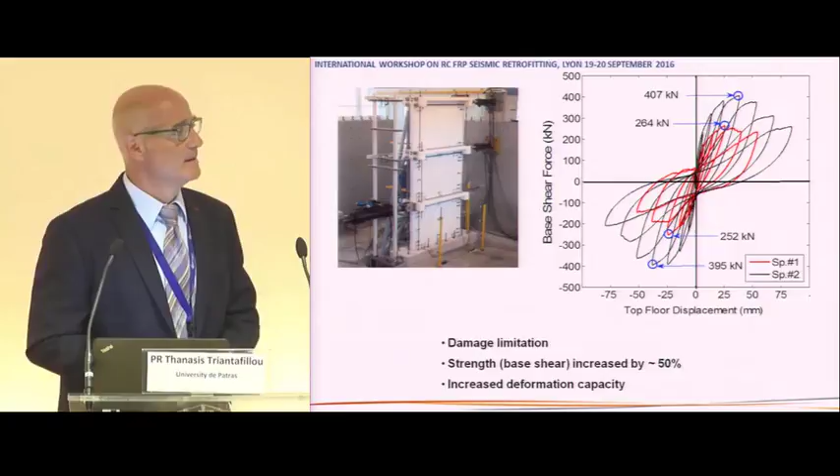With red, you see the response of the frame without this strengthening solution, and with black, you see the response of an identical frame retrofitted with the TRM system. The damage was reduced substantially. The strength was increased by more than 50%, and the deformation capacity by about the same amount.

I think there is a video here illustrating the difference in the damage. You see how much damage you get in the infill if there is no jacketing with the TRM system, and how this damage is limited. There is very, very little cracking in the matrix in the case of the retrofitted infill.

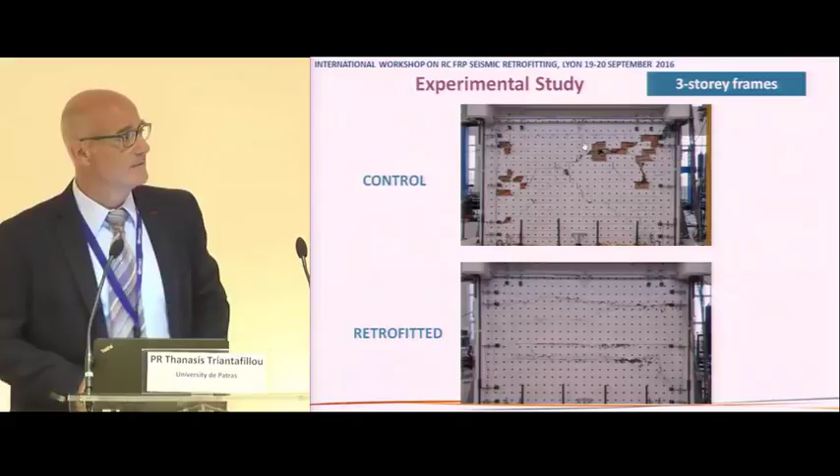I will not talk about modeling. I will jump to my conclusions. The first conclusion is that the FRP strengthening method is easy to apply, fast and quite effective. There are some very basic principles which we have to respect.

Loads are only carried by the fibers. Stresses, forces are only carried by the fibers. The material is not isotropic. We should not design having steel in our mind. There we have to remember this fact. The material goes linear elastic all the way to failure. There is no yielding. However, there is a lot of ductility, as we saw before, because the material has a very large deformation capacity.

We can use FRPs to do flexural strengthening, typically of beams, slabs, and columns, to do shear strengthening of beams, columns, shear walls, joints, and confinement for ductility, for strength, etc., of columns.

Last but not least, TRMs, those textile-based composites, where fibers, metallic or non-metallic, are combined with inorganic matrices. That's an interesting concept, and this is something that we will see more and more in practice in the years to come.